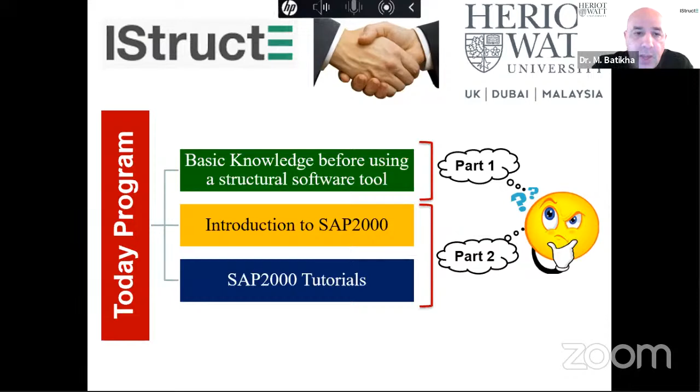And in the second part, I'm going to use SAP2000 as a common software to apply this basic knowledge I'm going to provide today. So let's start with the basic knowledge. As all of you know, the structural system means that you have a structural element and support, and this structural system has loads applied to the structural element.

When we are talking about the structural element, we are talking about two things here, material and dimension. So you need these three parts to be ready for your software. You need the structural element, which means material and dimension. You need actions, load, and you need support.

As well, the common lateral load comes from wind load, which is external pressure applied to our building, and seismic load. The seismic load is ground movement, but because of the dynamic nature of this ground movement, we transfer this ground movement to an equivalent force applied to our building. But actually the seismic load is ground movement. It's not a force applied to the building.

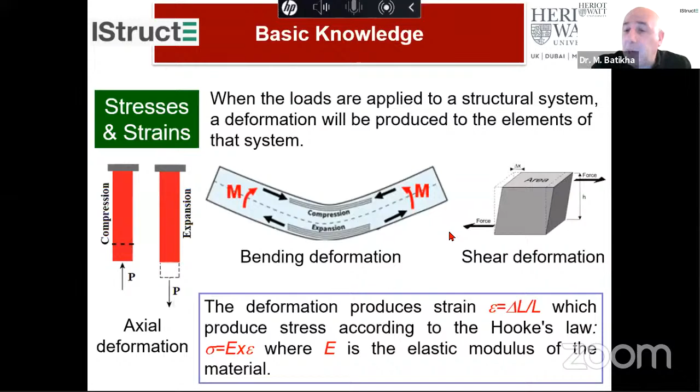When you combine these strains with the elastic modulus, and the elastic modulus here represents the material. So any material, according to its type, has an elastic modulus. So when you combine the strain with the elastic modulus, you obtain a stress. When you take this stress and combine it with the properties of the section, for example, stress times the area, you obtain a force. Because of that, we call this force the stress resultant. That's what we call internal force, but actually it comes from the stress.

We have another type of stress, which is shear stress. The shear stress comes from two types of forces: shear force or torsion. The torsion as well causes a shear stress. But actually, these stresses do not cause the failure of the structural element. The combination of these stresses provides us something we call principal stress.

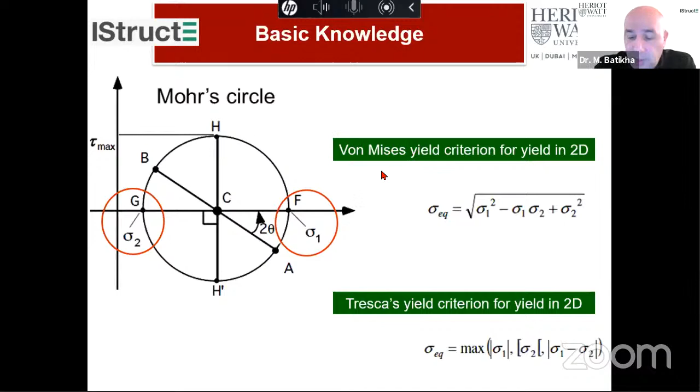Now, what is the aim of the structural design? We always in structural design look at two criteria. First of all, the strength. So we need to make sure that the material doesn't fail under a certain stress, or under principal stress, because principal stress is a combination between axial stress and shear stress, and it's bigger than any isolated stress. And the stiffness: we always need to make sure there is not much deformation.

You may have deformation but not failure, but this deformation will not allow you to do other things. If you have much deformation, you cannot install finishing, for example, or people don't feel comfortable. For example, if the slab is too thin and it deforms, it shakes under movement. So this will cause an uncomfortable life for the residents. So you need to check as well that the deformation is within a limit.

Now, after this introduction, before you start using any software, you need to collect the structural analysis data. You need to make sure that all these data are available before you start modeling or using any software. First of all, what is the type of element? Second, what is the dimension? When I'm talking about dimension, I'm talking about 3D dimension, section and length. So 3D, because the section has two dimensions.

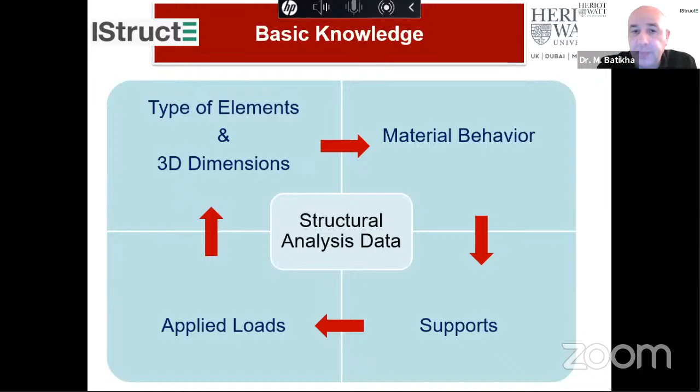For example, some elements like a slab. The thickness of the slab is too small in comparison with the other dimensions, the length of the slab in two directions. So why deal with the thickness? We can transfer this 3D slab element to a 2D element, and we just model the face of the slab. So there's no need to model the thickness.

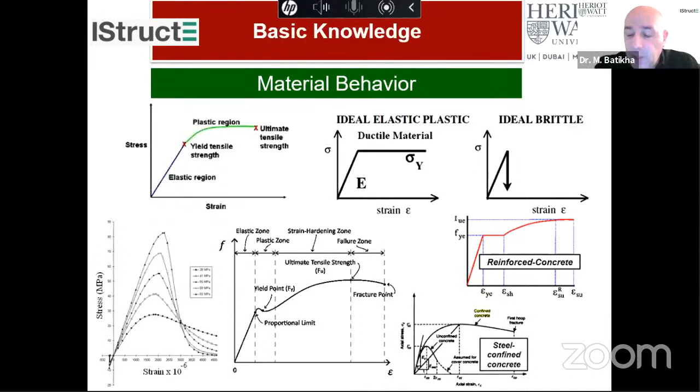You see that before you add steel, the failure of a cylinder of concrete is very brittle. But after you add steel, here you confine the concrete by steel. So you see how you have long deformation before the failure, and the steel provides more strength and more ductility. So you need to know what is the material you are dealing with and what is the curve of this material.

Why? Because in reality, you have a little displacement, but this spring has a stiffness, which is the force applied to this support over the deformation. So for example, in reality, the column itself is not a fixed support because you have deformation in the column, but this deformation is too small compared to the force, so the stiffness is considered infinity, and because of that, we say that we don't have movement below that beam if it's supported on a column, so we add a support. But actually, the real behavior is a spring.

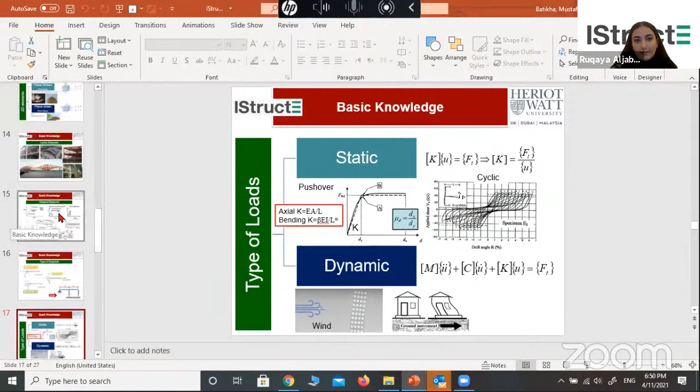Hello. Yeah, we can hear you. Yes, ma'am. I'm talking about the axial loading. Yes, axial load, okay. So you apply axial load to an element, like to a column or something? Axial load to beam, sir. Axial load to beam. Yeah, so have a look here.

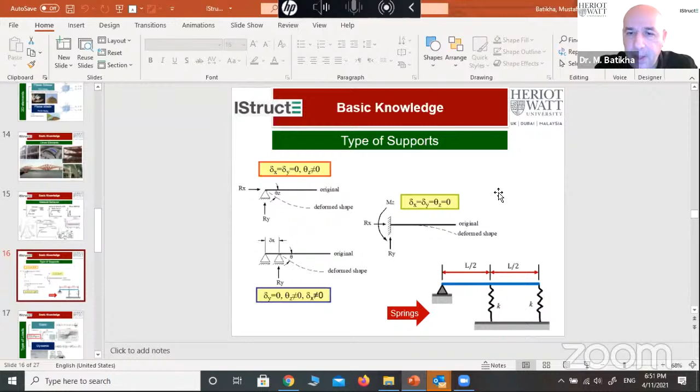When you apply axial load to a beam, you will not have shear force unless you have buckling. Why? Because the buckling will cause a bending moment. As I explain here, I'm not sure if I'm still sharing my screen. Yes, sir, you are. Okay, so here,

this is the axial force. This is an example of the axial force here. And this is a beam actually. Don't consider this as a column. Consider it as a beam and you apply axial force. So you see that without buckling, the shear force and bending moment in this element is zero.

But if you have buckling at this element, you will have extra bending moment. And because you have bending moment, you will have a shear force. You will have a lateral reaction here because of this extra bending moment. So at that time, yes, you will have shear force, if you have buckling.

Thank you, sir. Yeah.

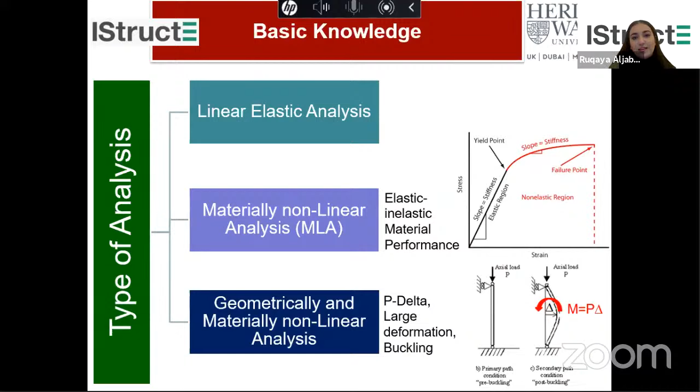Last question is from Mohammed Faisal. He's saying, my question is regarding what was mentioned earlier about dams. It is a massive structure which has measurable dimensions in 3D. So if we modeled it as a plane element, can we neglect the third dimension stresses and deformations? And by third dimension, he means the width of the dam.

Yes, sure. There is a special element in software. The software uses a different name for that element. It's a plane strain element. So if you model this face here, and you give order to the software that this face is plane strain, the software itself will understand that this is a plane strain because of this thickness

here, okay? And we do that with soil modeling, and as you see here in earth fill dams, yes, we do that. But you need to give order to the software that this element is a plane strain element.

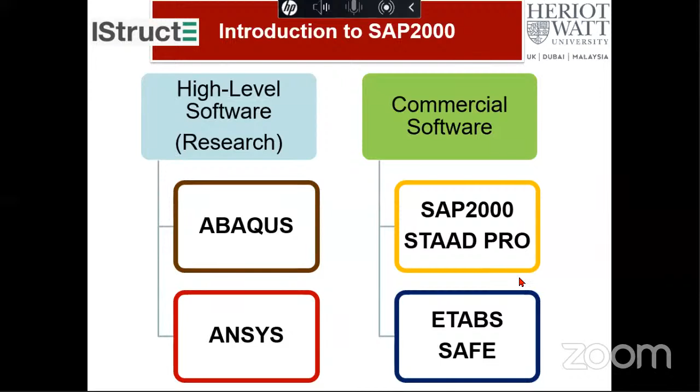So after this basic knowledge, we selected SAP2000 to introduce it to you. And I believe that most of you are working on SAP2000 or have an idea about SAP2000. But before we start with SAP2000, let's give an idea about the software available in the market. First of all, we have two types of software. The first type is high-level software, and it's for doing research. For example, Abaqus is research software. So it's not easy to be used.

And if you are using this software for a simple problem, it's not economic. So actually, we use Abaqus when you want to introduce the nonlinearity of the material, to do buckling, something like that. And ANSYS as well is research software. And we have many specific software. Abaqus is general research software you may find in most research institutes. We have commercial software like SAP2000, which is general software.

But again, SAP2000 or STAAD.Pro, for example, these two programs deal with a limited type of elements. For example, I talked about many types of elements: line element, 3D element, plane strain element, plane stress element. And I talked about the nonlinearity of the material. So SAP2000 or STAAD.Pro is sometimes limited. It doesn't take

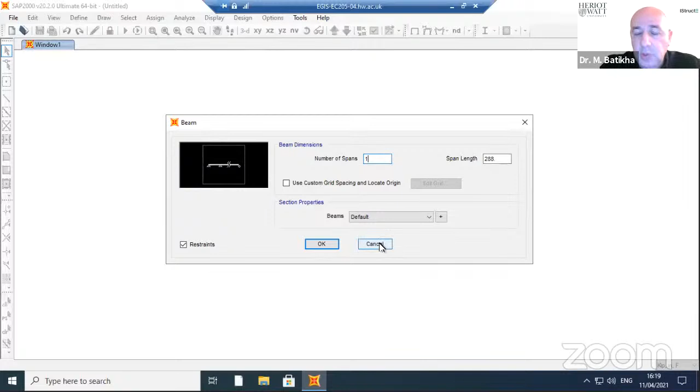You see here on the right bottom, there is a box for the unit you are going to use. Now the units we are using are kip, pound, and feet. Okay, so we are going to change this to the unit we know. So we open this box and we select kilonewton meter.

Okay, now I'm going to repeat what I have done. So file, new model, I'm going to select beam. Now, the number of spans, we have one span for this beam, and the span length, as seen here in my model, is 6 meters. So it's 6, it's ready here. So I'm going to say okay.

So you see here that our beam is ready. And this beam is a one span beam. We can divide this span into many parts, by the way, by going to edit. If you go to edit, you will see a lot of commands here. Like, for example, edit line, divide frame. So you can divide this frame into many frames.

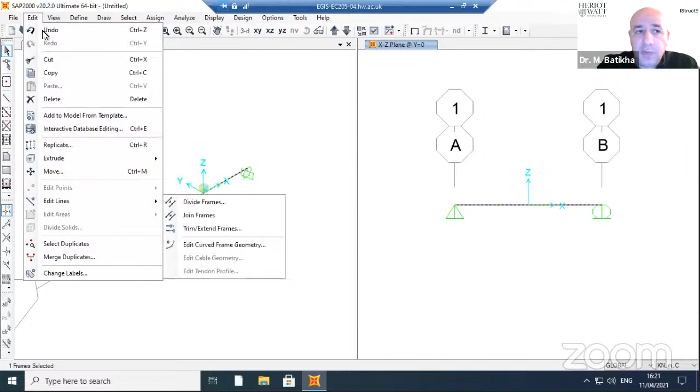So you can add joints, you can add extra parts. So you see that edit offers you a lot to do as well. You can copy, for example, replicate here. You can move. There's a lot; we don't have that much time to go through each command, but if you are working alone, you can try these commands, and it's very easy to use. SAP actually is easy to use.

Now, here I have length, but I don't have a section yet. Before I have a section, I need to have material. So to define a material, you go to define here. In define, you can find material. So we select material. You have two ready materials here, one for concrete and one for steel, but you can add your own material, for example, if I say add new material.

Okay, I want to start with steel, and I want to add user. Have a look. Standard, what's the standard? You can keep the standard ASTM, or you can use your own material, user material, as seen here. And I say okay, I'm going to call it steel. You can change the name if you want.

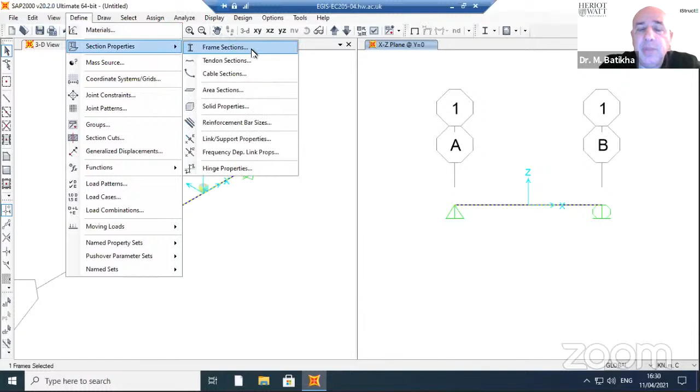Now here there is an assumed section by SAP, but if I want to include a new section for steel, I can import this section. So I'm going to say import new property. Have a look. It's steel, I section. I'm going to select I section because in my example here, we have a steel section, UK beam, 356, 171, and 51. So I'm going to select I section.

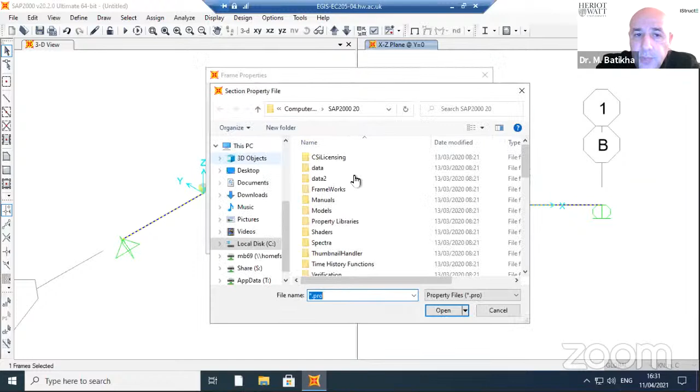You see that there is data open to me. So if I go down, you can use a section from AISC. Here, for example, BS shape. So I'm going to open BS shape here, and I'm going to say open. You see a lot of ready sections open to me, hot rolled sections. So I'm going to select the section I'm looking for. It's this section, you see. And I'm going to say okay.

In this section, have a look, immediately it drops the size of the section, okay? You can do your own section, by the way, and add your own size. It's not necessary that you take the same section. You can do modifications to these numbers as well.

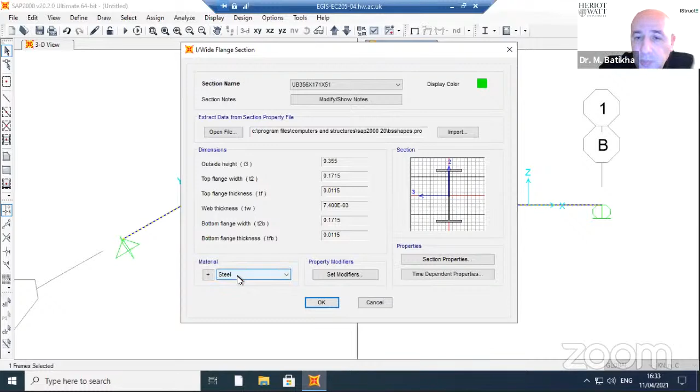Here, when you go to the material, you need to select your material. So have a look. If I open this arrow here, I'm going to select the steel I set for this example. So here the material is steel. So be careful not to forget to change the material for this section. I'm going to say okay now.

You see that I have this type of section. So I have this type of section, and for this section, we have the material we select. I'm going to say okay. Now, have a look. If you go to this mark here at the top, you see here at the top, and you open it, you will obtain here display options.

In that display option, if you go to the frames and you ask for sections, to see what section applies to your element, and say okay, you will see that you don't have the section you created. You still have on your element the old section, FSEC1. This means that you need to assign the new section to your element.

How do we do that? We go to assign here. You see this tool at the top, assign. So we open it. This tool can assign to the element, to the joint. For example, you can change for a joint the type of boundary condition of support. You can release or you can do a constraint for a certain joint. You can as well add a section for a frame.

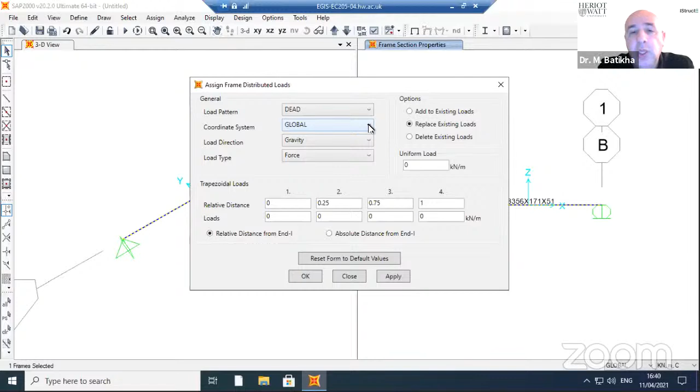And this dead load, I want it to be in the coordinate system. We have two types of coordinates in any software, not just SAP2000. We have global coordinates, which is XYZ, and we have local coordinates. So the local coordinate belongs to each element, but the global coordinate belongs to joints and all elements. So it's the XYZ.

Okay, what is the load direction? Have a look at the coordinate here on the screen. You see that the X axis is along my element, and the Z axis is perpendicular to the element. I want to apply a dead load parallel to the Z axis. So I go to load direction and I select Z. Here there is already a box for uniform load. So for example, I want 20 kilonewton, but the direction of that 20 kilonewton is opposite to Z. So I add minus 20.

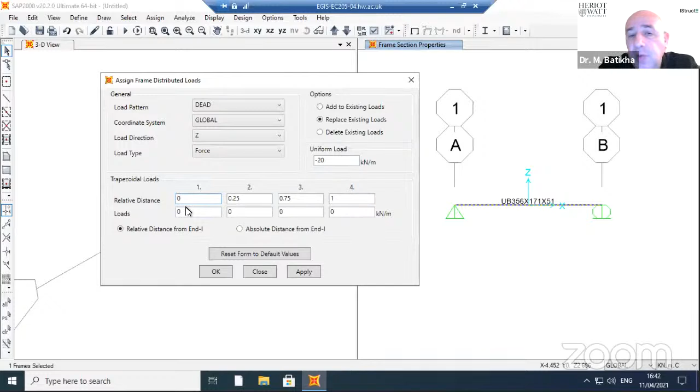By the way, these boxes here are for doing loads different from uniform load. So you can do rectangular, non-rectangular, trapezoidal load. You can use this box to do triangle load, trapezoidal load, so different shapes from the rectangular uniform load. But if you have a uniform load, you can use this one. So this box here is to introduce non-uniform load to your element. I'm going to say apply and have a look now. I have 20 kilonewton per meter as a dead load.

I need as well to apply a live load of 75 kilonewton, 2 meters away from support A. So again, I'm going to select the element. As you see, I select the element, and that dashed line is a note that you selected this element. And I'm going to assign again and select frame load again. But now my load is a point load, so I'm going to select point load. Now, the load pattern is live load, so I open and say live load. Again, for this live load, I'm going to select the global coordinate system, and again the direction of the load is parallel to Z.

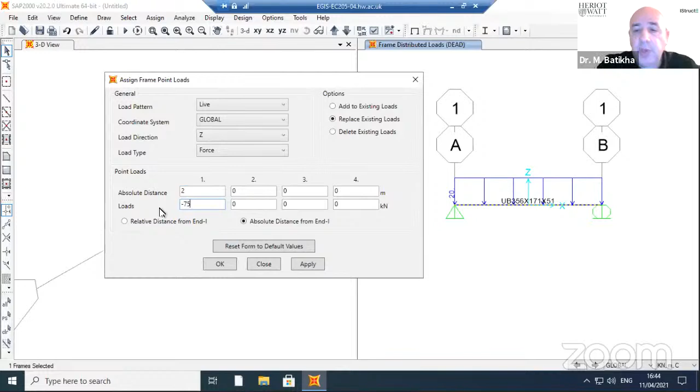Now, I need to apply this load 2 meters away from the left support. So what do I do? Have a look. You have two ways to apply that: you use the relative distance or you use the absolute distance. I'm going to use absolute distance. What is the distance? I'm going to say 2, and 2 is 2 meters. What is the value of the load? In my example, the value of the load is 75 kilonewton, so I'm going to say minus 75 because it's opposite to Z. I'm going to say okay, and have a look here at the screen. I have live load equal to 75 kilonewton.

To solve this example I need to do a combination here. So I'm going to use the Eurocode 1.35 dead load plus 1.5 live load. So I open define again, have a look. There is a command in define called load combination. I'm going to open it and add a new combination. I'm going to title this combination by the combination I know. It's better that you title the combination with something you know. So 1.35 dead load plus 1.5 live load.

Have a look here. The first case is the dead load. The factor is 1.35, so I'm going to say add. The second load case name is live load. What is the factor for live load? The scale factor is 1.5. I'm going to say add as well. So you see that I have two loads in this combination: the dead load is 1.35 and the live load is 1.5. I'm going to say okay. So this is the combination I have, and I'm going to say okay.

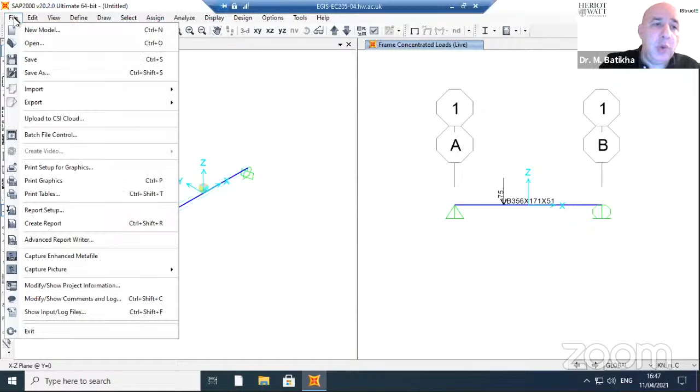So I'm going to save it. Save as, and please don't save directly, save it within a folder, because many files will be opened after running. So I'm going to create a folder. I'm going to call it SAP2000 IStructE. I'm going to name this example 1. Save. So here is example 1. I'm going to run this example.

Have a look, this is the button to run the example, or you can go to Analyze and say Run Analysis, or you go directly to this arrow here, sorry, this one. So if I open it to run this example, you see that I have dead load, live load. The modal case here, you don't need to run it, because usually this is run for dynamic.

So you don't have dynamic here, so you don't run it. So I press here, don't run this case. And I'm saying here, run now. So now you see on this screen that we have a deformation. Now let's explore our result.

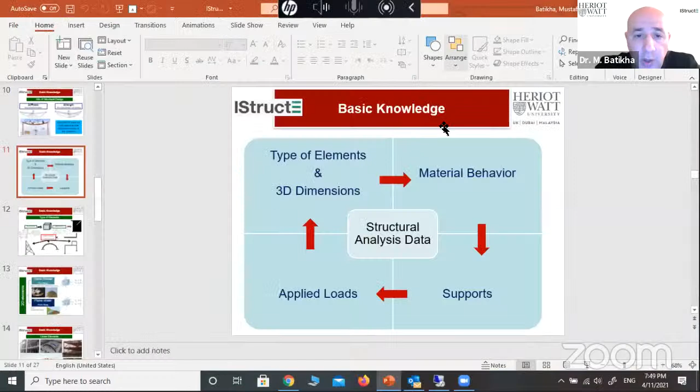The first button is to get your model back to its origin. So, for example, if I'm standing on the window on the left and I press this button, you see that the model gets back without the deformed shape and it's back to its origin. The second button here is to show the deformed shape. So if you press here, this button,

you will be asked under which deformation you want to see. Usually for steel, we check the deformation under live load. So I'm going to say under live load, and show me here the original wire shadow, which is the original shape. So show me the original shape. So if I say okay, have a look, this is the deformation of this

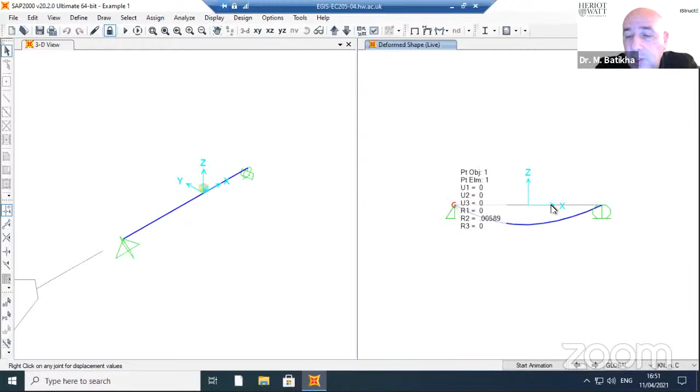beam. You don't have a value here. This doesn't show the value. It's because the deformation will be shown if you have a joint. Here you have only 2 joints for this element, this support and this support, but we didn't create a joint at mid-span. When you create a joint at mid-span, and I'm going to show you later, you can see the deformation.

Now, the bending moment and shear force. So if you go to this button here, and you open it, you can go to joint, and at that time you obtain the reaction. So for example, if I go to joint, and I ask, give me the reaction under the combination, and I say okay, so have a look.

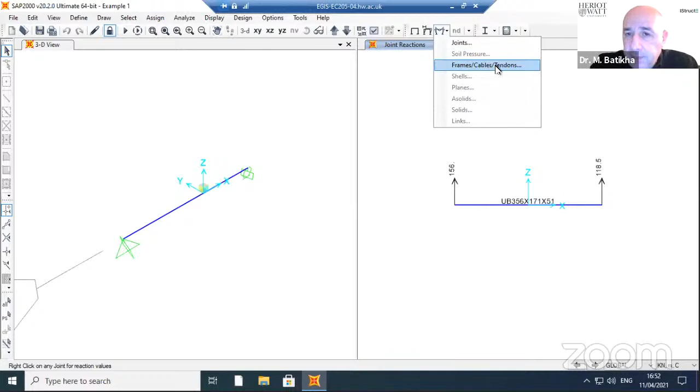We have 156, which is the same as the shear in the example. You see, manually, we obtained 156. And we can go to this command as well, frame, here, to see the internal force or the stress resultant, I call it. Again, I select the combination, and I ask, can you please show me the shear along local axis 2, okay? And here is the shear

diagram. You can show this diagram, you can show the values on this diagram. So if I repeat this command, if I go to this button again and select frame, have a look. There are 2 options for the diagram, fill diagram or show values. Show values. So say okay, and you will see that this is the shear diagram as expected

manually. And here you see that there is a cut because you have a concentrated load here, 75 kilonewton live load. Because of that, you have a change in the diagram. And as well, if you want to see the bending moment, we go again to this button. We select frame and moment about 3-3. These 3-3, 1-1, 2-2 are local axes. So about 3-3, okay, and here is the bending diagram.

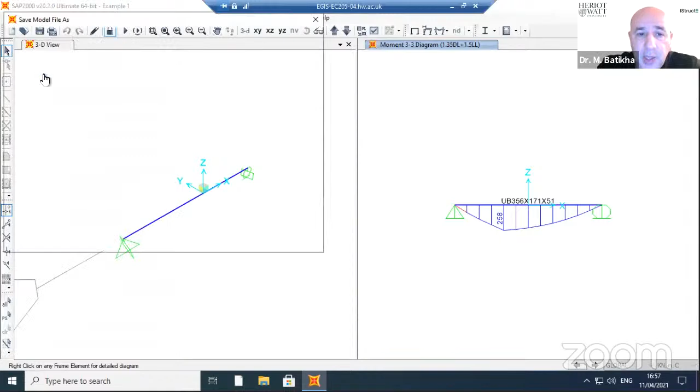Okay, so this is the first example. The second example is the same loading, but I'm going to use a concrete section. So I'm going to save this example as example 2. Please save the same example under a different name, example 2, to make some changes. So I'm going to say save.

I'm going to define again. I'm going to create concrete material. So add a new material, concrete, and user defined. Again, I'm going to make the density 0 to avoid it being included twice in my calculation. The unit, I'm going to change it to Newton millimeter here.

In my example, the elastic modulus for concrete is 34, and the Poisson ratio is 0.2, and FCK, the characteristic compressive strength, is 35. So here is 34,000. The Poisson ratio is 0.2. And this one, FC is 35. And you can keep the rest the same.

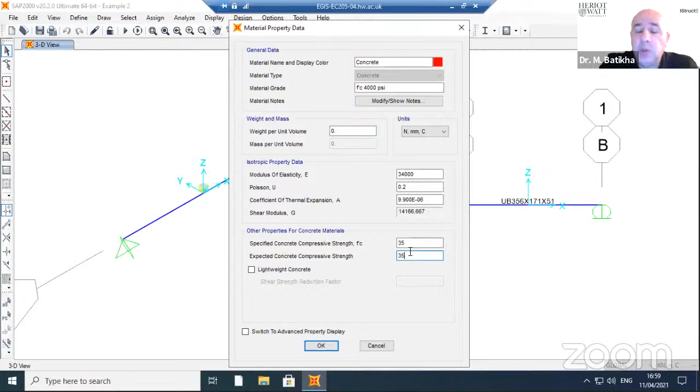Again, these two values are not needed if you want to do structural analysis only. But if you want to do design or plastic analysis, at that time you need these two values. So now I have concrete material as seen here, and I'm going to define a concrete section.

So I go to define again, section property, frame section, I open it, and I'm going to add a new property. The material is concrete. When I say concrete, have a look, there are ready sections here. I'm going to open rectangular. The depth for this section in my example is 600 and the width is 250. So here is 0.6 meter because my unit is in meter, and here is 0.25.

Yes, meter again. And by the way, you can add reinforcement for this section if you want to do plastic analysis or check the capacity of the section. So here there is concrete reinforcement. But again and again, please don't use this unless you do manual validation. So do an easy example, just to be confident of what you are doing.

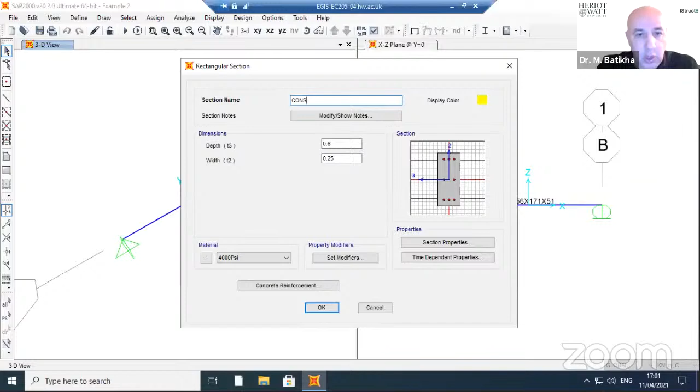So I'm going to say okay, and sorry, I didn't change the name of the property here. I'm going to call it con section. So have a look, I have con section here. I'm going to select my element and assign this section to my element. So I go to assign, frame section, con section, and say okay, and have a look, the section here is concrete section. It's not steel anymore.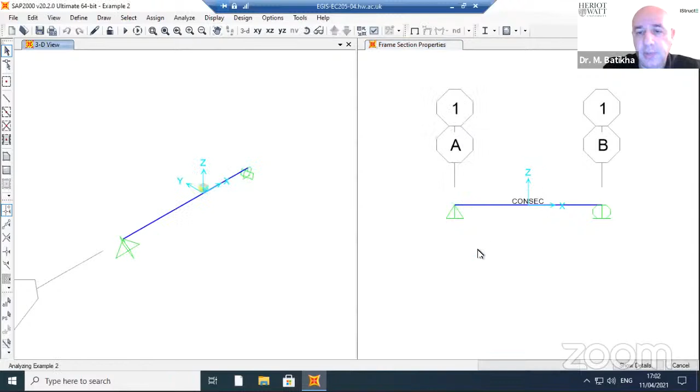Everything is ready. I have support, I have dimension, I have material. So I run again. For sure, in this section you will have the same bending moment and the same shear force. Why? Because it's a determinate structure. But if you have an indeterminate structure, for sure you will have different values.

But you will have for sure different deformation. The deformation is very different here. Why? Because the moment of inertia and the material are different in both examples. So the deformation will be different. Okay, I believe we may need a break here. So we finished example 1 and example 2, and the other examples will be fast.

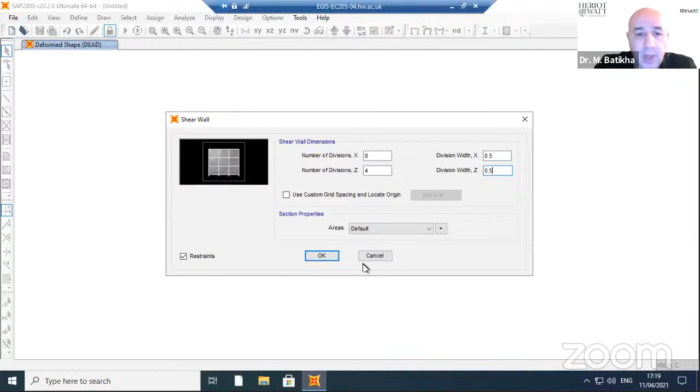So we have 4 meters length in X direction. I'm going to divide this into 8 divisions, which means 50 centimeters or 0.5 meter for each division. In the Z direction, I have a 2 meter dimension. I'm going to keep the division of half a meter in Z direction as well, which means I'm going to divide this slab into 4 divisions. So I'm going to say 4, and the division width is half a meter again. So I'm going to say okay. So have a look.

Here we have a slab. But have a look at this slab. Because I selected a wall, the support is only at the bottom. Have a look, at the bottom we have support. So we need to change this support.

So I'm going to select this support, this edge. Have a look, the nodes are selected. I'm going to select the top edge as well, because I have support at top and bottom. And I'm going to change this support. How do I do that? I go to Assign,

then Joint, Restraints. In these restraints, you can select the support you want, or you can add the support manually. For example, if you select pin support here, have a look. This means that you prevent the deformation in 3 directions. But actually, if you apply this pin support, you may have axial force when this slab deforms.

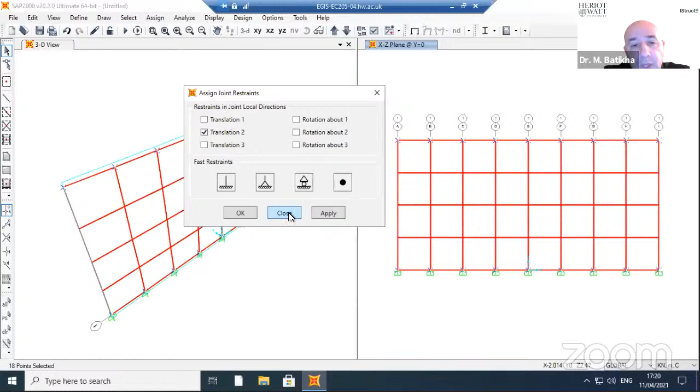Because of that, I'm going to tell the program to only restrain this slab against the Y direction, the out-of-plane direction. Have a look at the coordinates here first. You see that I have coordinates X and Z in plane, but out of plane here is the Y axis. So I'm going to say, please restrain the deformation in the Y direction, the out-of-plane direction.

So I'm going to say okay. So now have a look, the support changed. It's not a fixed support anymore at the bottom. It's in the Y direction. Again, I'm going to define material and section. So Define, I'm going to do this step fast. So Define Material.

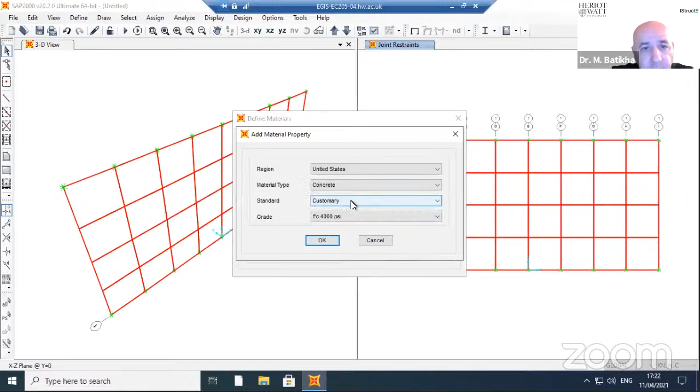I'm going to say Add New Material, and I'm going to select concrete. And I'm going to add user material. I'm going to say okay. So this is concrete material. For the density I'm going to say 0, because I already included the self-weight in the load. And I'm going to add the properties of the material. So here, Newton millimeter.

So here, have a look. This is the property of the material. E is 34, FCK is 35, and Poisson ratio is 0.2. So here is 34,000, 0.2, and here is 35 megapascal for FCK. I'm going to say okay, so I have concrete material now.

Okay. Now I'm going to define a section for this area. So I'm going to Define Section Properties, Area Sections. Have a look, area section. Open. It's a shell section. I'm going to add a new section. I'm going to give it a name. I'm going to say that this is a slab. Have a look at how many types you have.

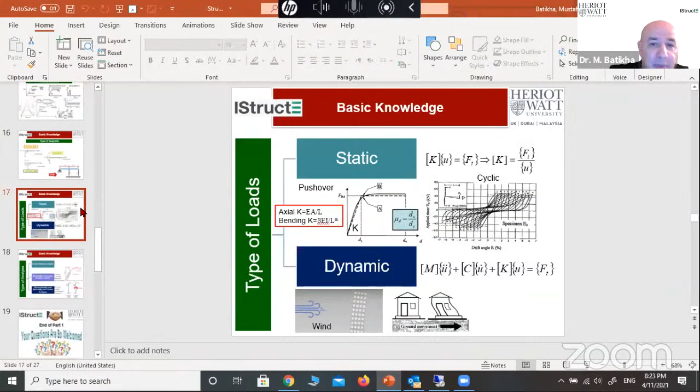So for example, in our example, the minimum dimension or the short direction of this slab is 2 meters. If we take 1/10 or 1/20, for example, this means that this slab is 100 millimeter.

So this slab is for sure a thin slab, but the thick slab is what I talked about, plane strain, where you consider the shear deformation. So plane strain is the thick slab. So here you select shell thin or shell thick. When you select plate, this is usually for steel, and as the name says, it's a plate, so the stress doesn't act in the Z direction.

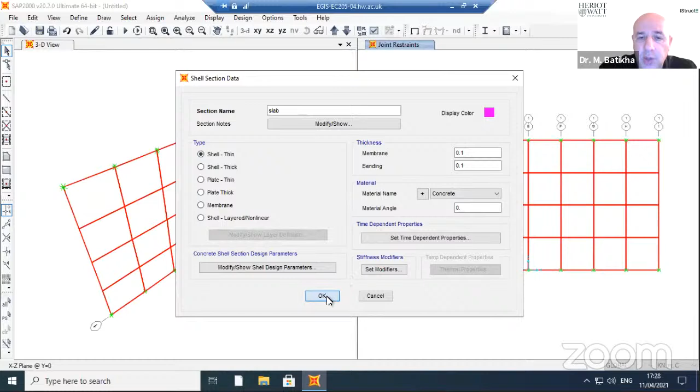So I have now this element. I'm going to select the element here in my screen and assign this section to this element. So have a look: assign, area, because I'm dealing with area, sections, slab. I say okay and have a look. All the elements here have slab section with concrete material.

Now I'm going to apply load. Again, I'm going to define and open load pattern. Dead load, I'm going to make the self weight 0 here. And I'm going to do live load. We did that before. So live, and I'm going to add new load pattern, and I'm going to say okay.

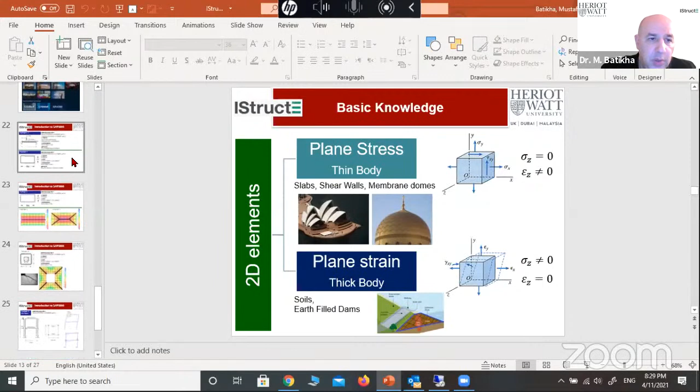Now, what do I have in this example? We have dead load 3 and live load 2. But actually, we need to add here the self weight itself. We have 0.1 thickness, and we know that the density of the concrete is 25 kilonewton per meter cube. So 0.1 times 25 gives a self weight of 2.5, plus 3. So we have a total dead load of 5.5 kilonewton per meter square.

So I'm going to select this element and say assign, area load. What do I need to add? I need to add uniform. So here, uniform, dead load, global. Now, this load is parallel to the y-axis, as seen from the drawing. And I'm going to put 5.5 because the self weight and the service load total 5.5 kilonewton per meter square. So I say okay. So now I have dead load 5.5.

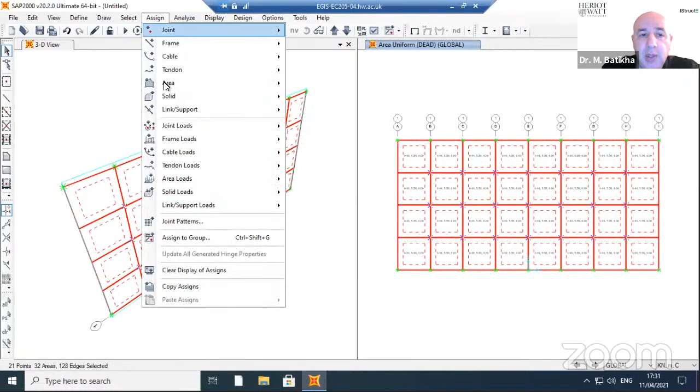I'm going to select it again to add the live load. So here, select this, assign area load, uniform again. Now I select live, and the live load is parallel to the y-axis as well. But the live load this time is 2 kilonewton per meter square. So I'm going to put 2 here, and okay.

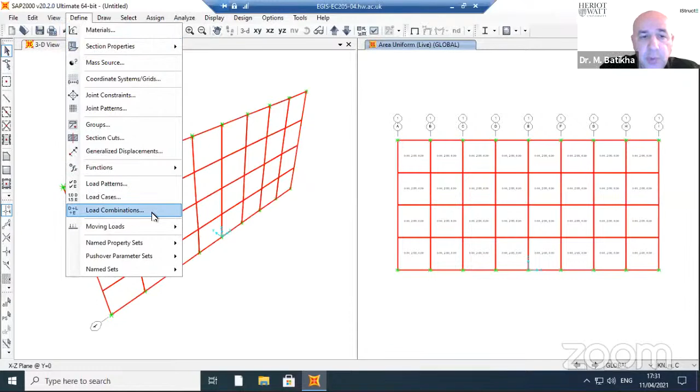So now I have dead load, live load, and I'm going to add a combination. I go to define, load combination. We did it in example 1. Add a new combination: 1.35 dead load plus 1.5 live load. For dead load, the scale factor is 1.35, and I say add. For the live load, the scale factor is 1.5, and I say add as well. So my combination is ready. Okay, okay.

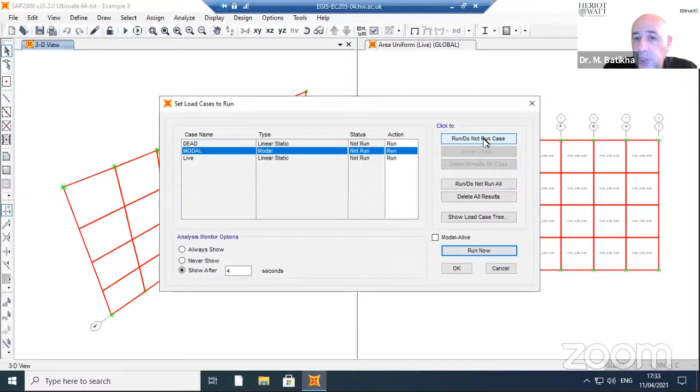Now everything is ready. I'm going to save this file, save as example 3. And it's ready to be run. Support, dimension, element type, material, everything is ready. So I'm going to run it. For the modal case, I'm not going to run it, because we run it if we need mode shapes. We don't need it here. So run.

You see, that's how we have deformation in this slab. Now I'm going to explore the bending moment. Here, it's assumed that the bending moment equals 5.2 and the stress 3.12. So I go to this button, I open it, shell, have a look, and here, resultant force.

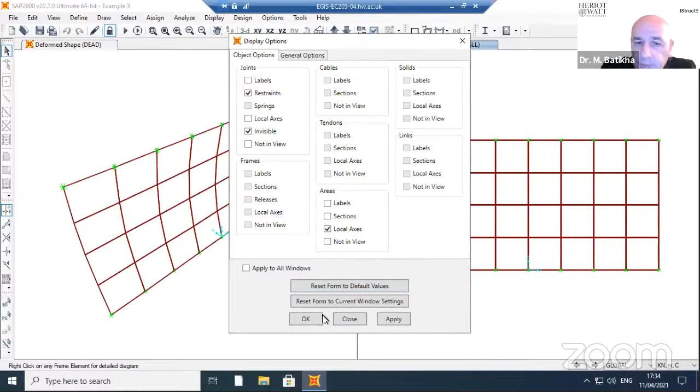I'm going to explore the local axis for this element. If I open here, at the top, this mark, I go to area, ask for local axis, and say okay. So you will see that you have this local axis for each element. The red one is axis 1-1, the green one is axis 2-2, and the blue one is axis 3. So I need the bending moment about axis 2-2.

So I'm going to open shell section, and I need bending moment M22. I say okay, and the maximum value here is 2.86. Sorry, here you see that this value is for dead load, so I need to change the combination. I select the combination 1.35 dead load plus 1.5 live load, and M22. And now I have the same answer as manually obtained. Have a look.

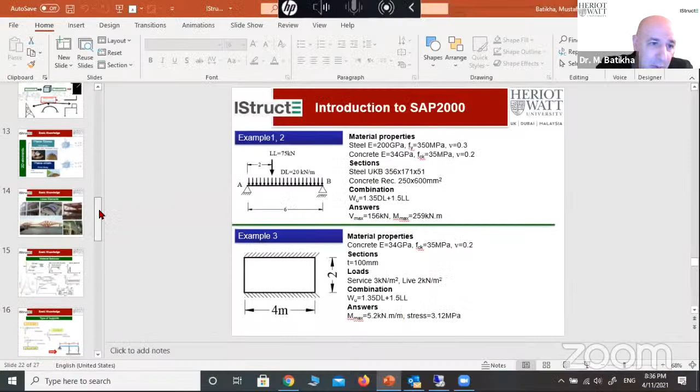If you remember, when I showed you the Mohr circle here, I said that there is sigma 1, there is sigma 2. This is the principal stress corresponding to tau equal to 0. And this gives you in concrete the failure shape. So if we go here and we ask for S max, S minimum, SVM, this SVM is von Mises. You don't use it unless you have a steel member to check if that steel material yields.

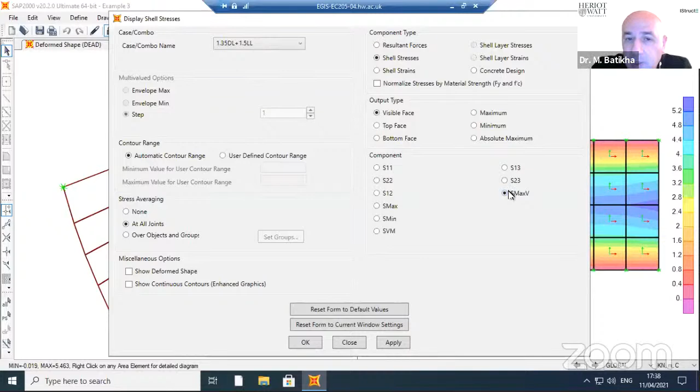Here, S11 is the stress in direction 1. S22 is the stress in direction 2, axial stress. S12 is the shear stress. S max, the maximum principal stress. S minimum, the minimum principal stress. SVM, the von Mises. S13, S23 are the shear stress, but here it's a thin plate, so you will not obtain shear stress. SMaxV is the principal shear stress. But actually to find the crack, you need S max or S minimum. So let's go with S max, apply.

And this is how this is visible. Okay, so here I'm going just to change the unit. So here is the stress, and you see the concentration; actually this is not shown because I need to show the bottom face. Here is minimum. Okay, have a look at this shape. You see here that at the center of this slab, you have like a line. Because of that, the one-way slab cuts into two at that line. And this is, by the way, the direction of the crack in this one-way slab.

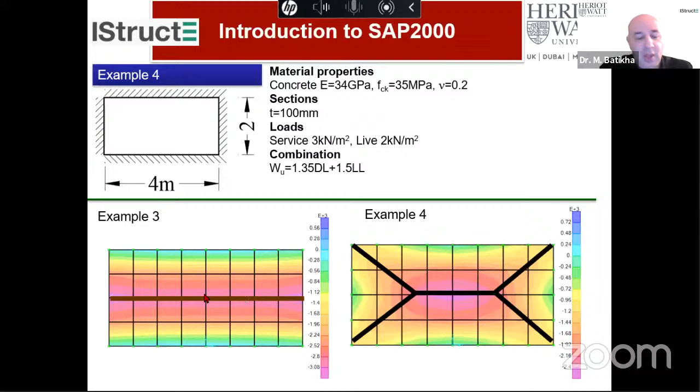Have a look at the variation of this contour. The maximum will be at the center, then it reduces slowly until you reach the support. But the concentration of this contour is at the center, and it's drawn at the line, and I'm going to show you now this line. So please have a look here. This line, you see this line? This is the crack line, how the slab cracks. So this is the example 3.

I'm going to deal with the same plate, with the same slab, but I'm going just to change the boundary condition. So I'm going to make it a two-way slab, exactly as example 4. So now this slab is supported from 4 edges, just to see what's the change. It has the same material, the same force applied, the same combination. So I'm going to save this example under example 4.

And I'm going just to add here, you see these nodes at these two edges. Previously they weren't supported; I'm going to support them. So I go to assign, joint, restraint. Again, I'm going to say, please restrain this joint against the Y movement. Okay, and you see that now all 4 edges are restrained. I'm going to run this example. It's very good to see what the difference is now.

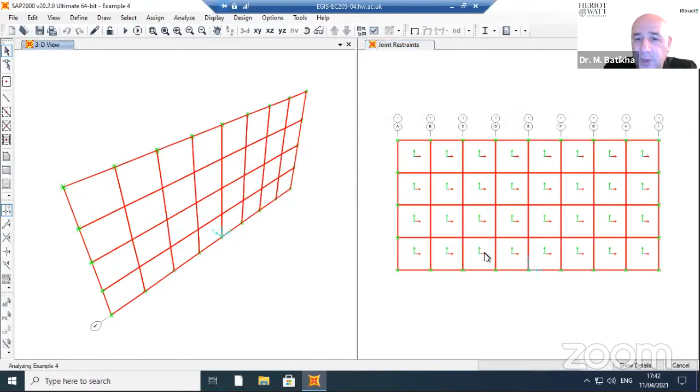So this slab, when you support it from 4 edges, acts now as a two-way slab. And the transfer of the loading to the edges comes through 4 regions, trapezoidal and triangular. At Heriot, I deliver a course about plastic analysis, and we deliver a topic called Yield Line Design. And to obtain the yield line design, you need to order SAP2000 like here: please provide me the principal stress.

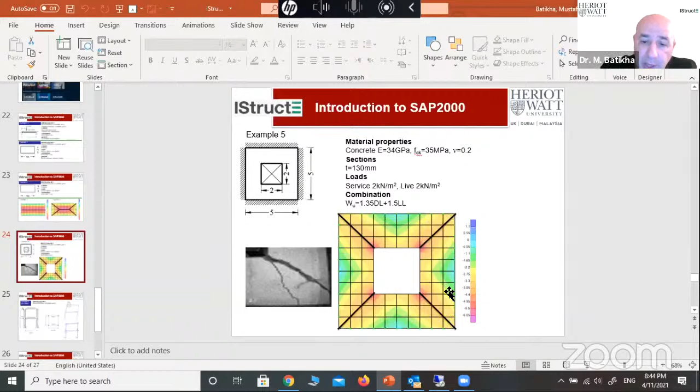Here, another example about an opening. You can do the same example. I'm not going through this example because it takes time. So you can model, and after that you can remove this opening. But what I want to say is to look at the principal stress again here, the principal stress.

You will find that there is concentration at the corner of the opening. After that, have a look how there is a line here between this corner and this corner. Have a look at the contour as you do a line. This gives you how this slab cracked. If you compare between this model and the real model here in the experiment, you will see that in the experiment you obtain the same direction of cracks as the software provides you.

So that's what I said, that if you want to know how the slab cracks, you need to ask for principal stress. This is very useful because if you want to strengthen this slab, you need to know how the crack happens in this slab to add reinforcement or to add a steel member or to add FRP, for example, fiber reinforced polymer. Because if you know this crack, you do a reinforcement perpendicular or across this crack, and at that time you strengthen this slab. So this is very important.

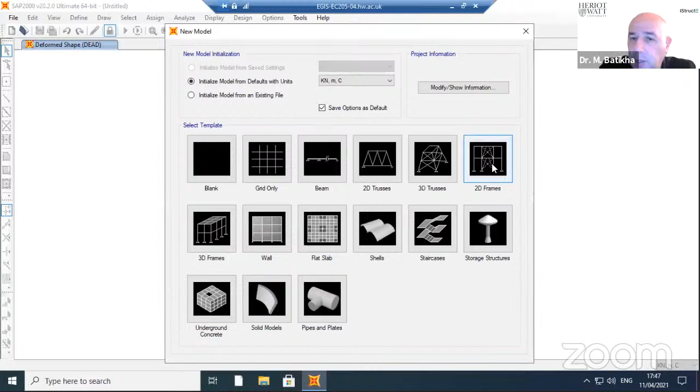First of all, I'm going to change the unit here to kilonewton meter. And I'm going to File, New Model, 2D frame. There are some questions you need to answer. What is the number of stories? You have 2. Number of bays, you have 1 bay only. What is the story height? You have 3. What is the bay width? You see in the example that the bay width is 5 meter. So it's 5, and we say okay, and here is our frame.

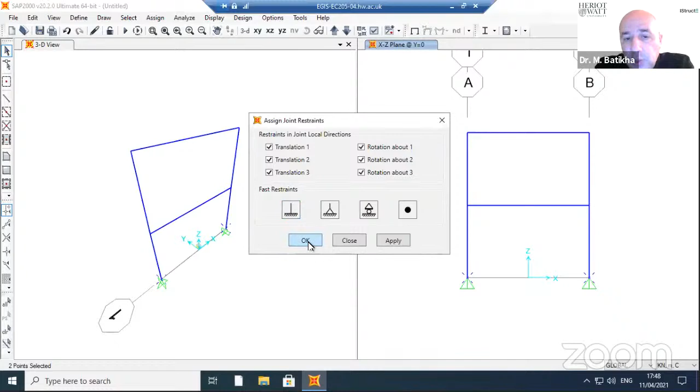I'm going to change the support. So I'm going to mark the joints; they are pin joints. I'm going to assign and change the restraint to fixed joint. You can press this button and immediately you obtain a fixed joint. So no translation, no rotation. I say okay, so now you have fixed joints. I'm going to define material and section.

Define material. We have here steel material as seen here. So add new material. I'm going to select user material, standard user, okay. For self weight, I'm going to say that it's 0. And I'm going to change the unit to add the properties of the material. The elastic modulus is 200,000 and the Poisson ratio is 0.3. I'm not going to change this because I'm not going to do design or nonlinear analysis, so it doesn't matter. So this is the steel material, okay.

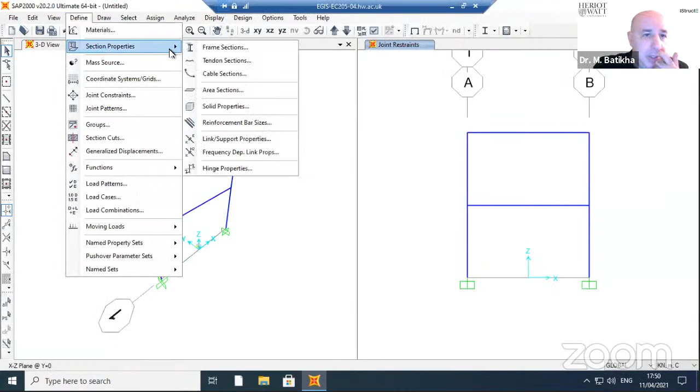I'm going to select section. For this frame, I need 2 sections, 1 for column and 1 for beam. For column, you see that the section is UK column 152, 152, 23. So I'm going to select section, frame section, import new property, I section, and as I did in example 1, I'm going to BS shape, and I'm going to select UC 152, 152, 23. So okay.

Again, don't forget to select the right material. So you open here and you say that this is steel. You say okay, and you have UK column. I'm going to select a section for beam. My beam here in the example is UK beam 178, 102, 19. So I need this section. I'm going to say okay, and don't forget that the material is steel material. Okay, so I have 2 sections. I'm going to say okay.

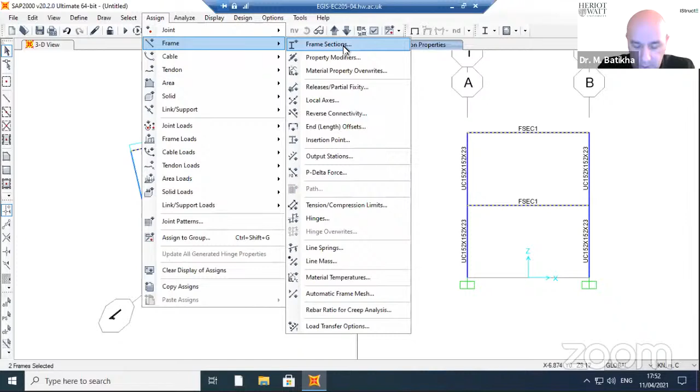For the column, I'm going to select the column as seen here. And I'm going to assign frame section for the column. I'm going to assign this section to the column. So have a look, I have the correct section. For the beam, I'm going to select the beam and I'm going to assign the section for this beam. So here is the UK beam.

So my model is ready with section, with material, with support. I need to add force. What is the force I need to add? As seen here, at first floor, I have 10 kilonewton, but this 10 kilonewton will be divided into 2 for each frame. I have 2 frames. So actually at 1 frame, we have 5 kilonewton at first floor, and we have 10 kilonewton at the top floor.

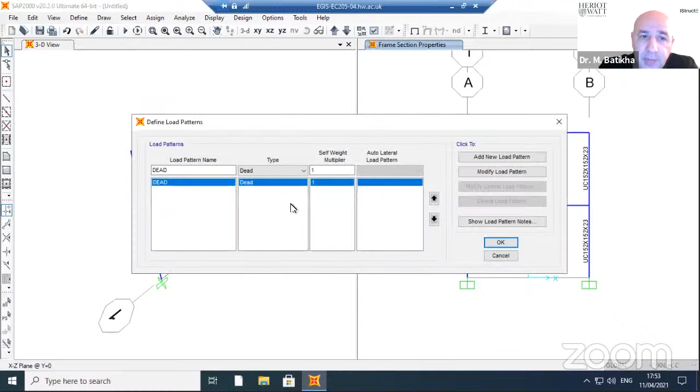So I'm going here to select this joint. Now I'm going to apply a force at a joint, not at a member. So this joint, and I go to assign joint load, but I didn't define the load yet. So I go to define here, load pattern. I say seismic. The type is earthquake and no self-weight required. So add new pattern, seismic. I say okay. Now I go to the joint here.

I select this joint. I go to assign joint load because it's joint load, force. This load will be parallel to x-axis, so it's 5 kilonewton. We agree that the 10 kilonewton we divided into 2 because we have 2 frames, so 5, and I say apply. Okay. The top will have 10 kilonewton because we have 20, but divided into 2 because we have 2 frames. So assign joint force, parallel to x-axis, and the value is 10. So here is the force applied to this frame.

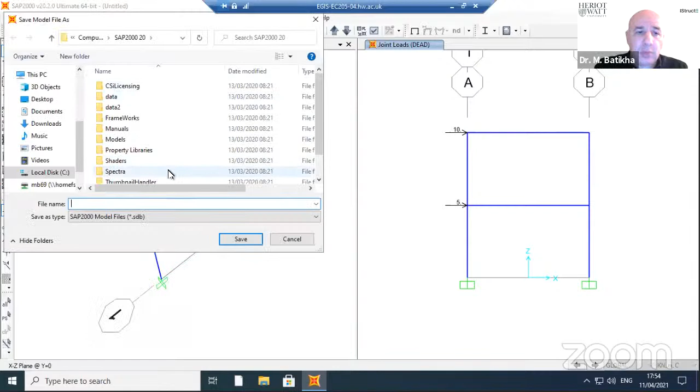I'm going to save this example under name example. I'm going to call it example 6, as in the presentation. So I'm going to say okay, and I'm going to solve it. It's ready. I don't need in this example to solve the dead load, so I'm not going to run it, and not the modal load. I need only the seismic. I need to run the seismic, and I'm not going to do any combination here. So run.

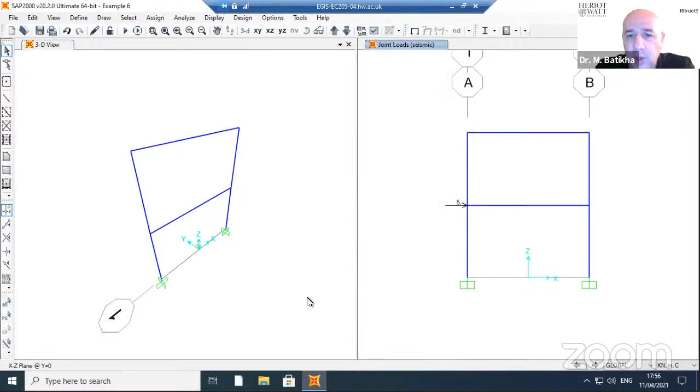So now have a look. First of all, let's do the deformed shape. So I'm going to select here deform, select seismic, and say apply. Sorry, I did a mistake, I believe, by applying loads. So this joint load force, I did a mistake that I didn't take seismic here. So I need to apply this 5 kilonewton to seismic case. I didn't change the load pattern. So I'm going to say okay. And here as well, sorry for this mistake, joint load force, and this is 10, and okay, and I'm going to run it. So you need to be careful with that.

So you see now we have a deformation. If you ask for deformation for seismic, and you stand at the joint, you will be given the deformation value. So this is telling you that the deformation value in U1, in x direction, is 0.0136 meter, because the unit is in meter, and the top story is 0.0291.

Now, if I want to explore the force, like for example, the bending moment. So here I go to this button, and I select frame. For seismic, I select moment 3-3, okay, and have a look. This is the shape of the bending diagram for a frame under seismic action. Okay, so this is how we model 2D frame.

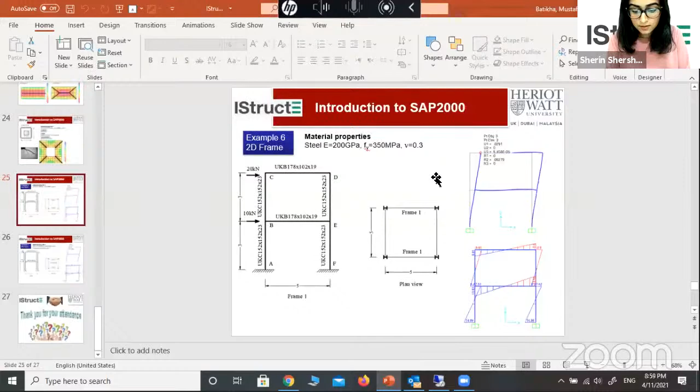I'm not sure if we have time to take the third. It's a 3D frame. I'm not sure because we are almost at the time of this workshop. So Sherin, what do you think? I believe we can go through it really quickly. I can stay, by the way, I'm ready. If everybody is happy, I don't mind. So do I go? Yeah, sure. If we can cover it really quickly, we'll have this one too. Okay, I need a further 15 minutes. It's fine? Let me just check 1 second. Yes, sir, please continue.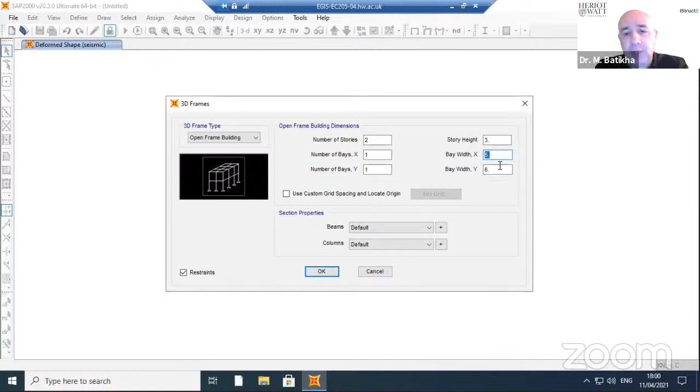Okay, so this is actually an important example here because I'm going to teach you now how you do diaphragm. And I'm going to solve this example as a 3-dimensional example. So here, I'm going to open a new model. We are going to select now 3D frame. Okay, so let's open it. How many stories do we have? We have 2 stories. How many bays in X direction? We have 1 bay. And in Y direction, we have 1 bay as well. The story height is 3, but the bay is 5 in each direction. So I'm going to say okay.

So now as seen here, we have this 3D frame, and I'm going as well to change the boundary conditions. So they are simple supports. So I'm going to mark 3 of them.

By the way, if you see these 2 arrows here at the top, have a look at the top. You can go now level by level. So you see this is level 1. Have a look at the left window and the right window. And this is the upper level. If I want to go down again, I go to this arrow to move down. So I go to the lower level and now to the foundation. So this way, you can go level by level and select the change you would like to make.

So I'm going to select the boundary condition. Then I do assign, joint, restraint, and I'm going to say fixed support. So this is okay. Now I'm not going to select for you material or frame... or let's do it fast. Okay, for the material, add new material, steel, user, okay. And here the density is 0, and I'm going to set this as 200,000, and this is 0.3, and I say okay, so I have steel material.

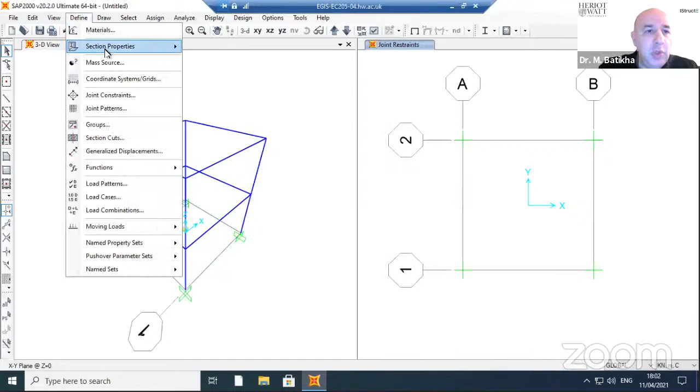And I'm going to define section property. Again, for the column, we have here BS shape, hot rolled section, so open. And I'm going to select UC 152x152x23. So here it is. And the material, don't forget to select steel and say OK. And I'm going to select my beam. So again, here is a beam, and this is the section for my beam, and I'm going to say OK. Don't forget to select the correct material, steel, OK, and here is OK.

I'm going to assign the section to my model. So I'm going up to the first floor, and I'm going to select my beams. And I'm going to the upper floor, and I'm going to select my beams. Have a look at the left window. That's 8 beams selected. I'm going to assign a section for these 8 beams. This is the beam, okay, and now they are assigned.

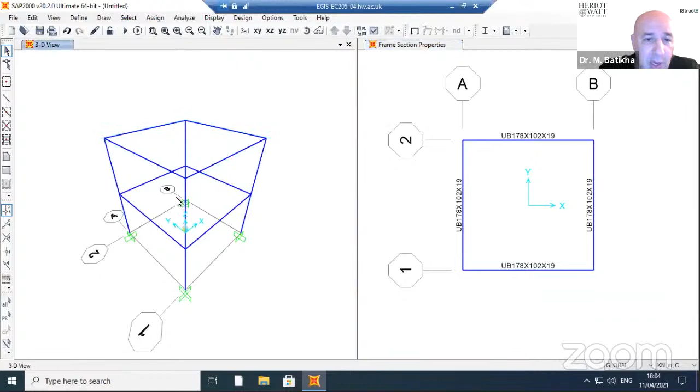I still need to select the column section. Let's have a look. What's the type of the column section here? If I go to this member again and ask SAP to give me the frame section, have a look. The frame section is FSEC1. Instead of selecting the columns one by one, I can go to the select command. Have a look at the top, select. I go to property, and I say frame section. So I'm going to ask SAP2000 to select all the sections which have FSEC1. Select, have a look. The columns are selected.

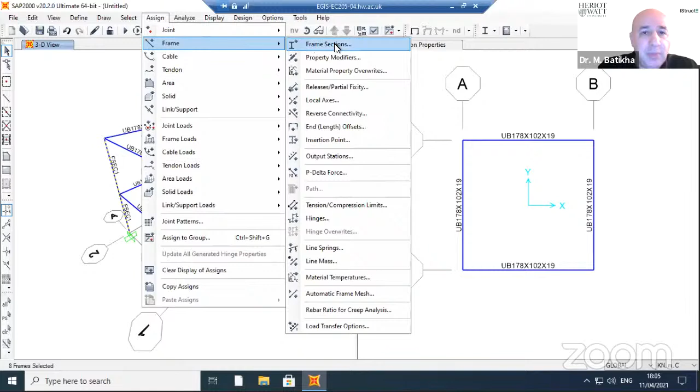I'm going to assign the section for these columns. So this is frame section. This is column. Okay, that's it. So I have now this 3D frame. I'm going to define a load pattern. Again, I don't care about the dead load. I'm going to apply seismic only. And the self weight is 0 here. So I'm going to say add new, sorry, not dead, it's quake. So I'm going to modify the load. So I have now a seismic load type. I'm going to say okay.

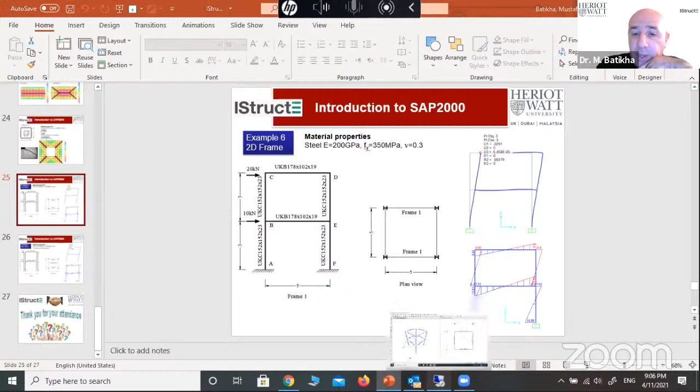Now, how do I apply seismic? And here is very important. So I have 2 forces, 10 kilonewton at the lower level and 20 kilonewton at the upper level, applied to the whole building. It's not for a certain frame. It's applied to the whole building. Where do I apply this force? Actually, I apply it to the center of the slab. So I'm going to create a slab here. Have a look what I'm going to do.

I'm going to draw. First of all, yes, I am in the top level. Have a look. I'm going to draw area. Draw rectangular area. So I go and select this point and this point. So we have here an area. You see what we have? And I'm going down as well to the lower level. And I'm going to select draw rectangular area, and I'm going to draw the area here. So have a look, I have an area at each floor.

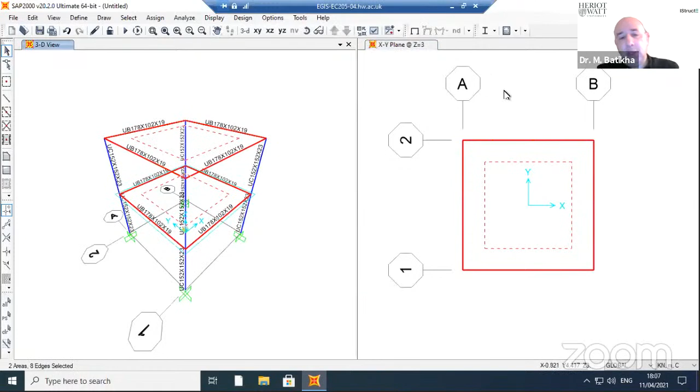I need to divide this area. Why? I'm going to tell you why. Because I need to apply the load at the center of this area. So I'm going to divide this area into 4 divisions. So I go to edit area, have a look, divide area. Here 2 by 2, it's fine for me. So I say okay and have a look. The area is divided.

I need a property for this area. I go to define material. I'm going to select concrete very fast. User, okay. This is concrete. The weight is 0. And the material, I'm going to select a material.

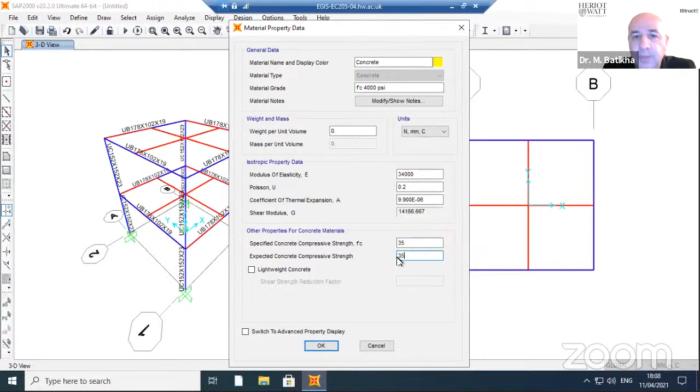So E modulus is 34,000 as I did. And I don't care about this 35 because I'm not going to design. So it's okay. So here is the material. And I'm going to define section for this area. So define section property, area section, and I'm going to add a new section.

I'm going to select shell thickness. I'm going to call it slab again. And the thickness is 0.1, 10 centimeter for this slab. And the material, again, is concrete. Don't forget to add the correct material. I'm going to say okay, okay.

I'm going to select this area and at the top as well. And I'm going to assign area section, and select slab.

Now here you have 2 options actually. You can add the seismic force directly to this point because this point is the center of the area. Always when we apply the lateral load, we apply it to the center of the area. And SAP2000 or any other software will distribute this to the lateral resisting system. But I'm going to teach you a new command, which is the diaphragm command, which is a very important command.

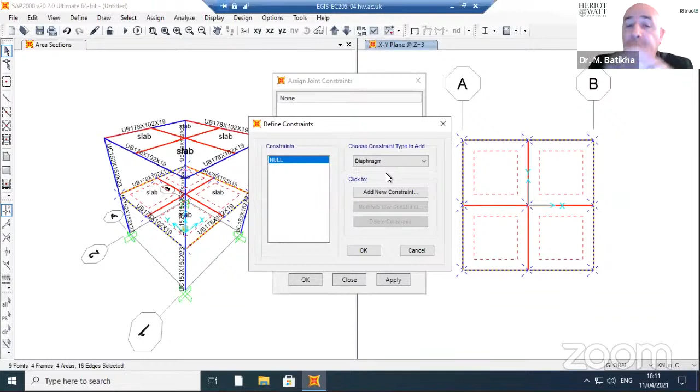The meaning of diaphragm in earthquake is that you have here a rigid slab which can confirm that all vertical elements connected to this diaphragm deform uniformly. Okay, so the rigid diaphragm confirms that all the vertical elements move or deform uniformly. So I'm going to say okay, and I'm going to say apply. So all these points now have a diaphragm.

And I'm going to the upper level and I'm going to mark this joint. And I'm going to say assign, joint, constraint. And I'm going to say diaphragm again, sorry, add a new constraint, diaphragm. I didn't add it, sorry. So diaphragm 1, I need this diaphragm to act along axis X. I say okay, okay.

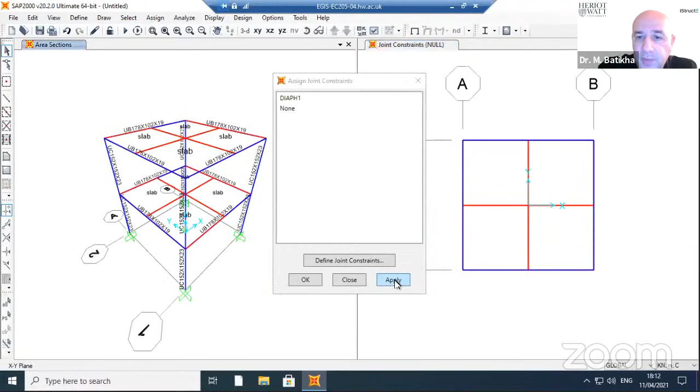So now I have a diaphragm. I'm going to the bottom level again, because I didn't apply the diaphragm. So select, assign, joint, constraint, define joint constraint, diaphragm again, add a new diaphragm. So this again about the x-axis. So for all the elements, the deformation along the x-axis will be the same or uniform.

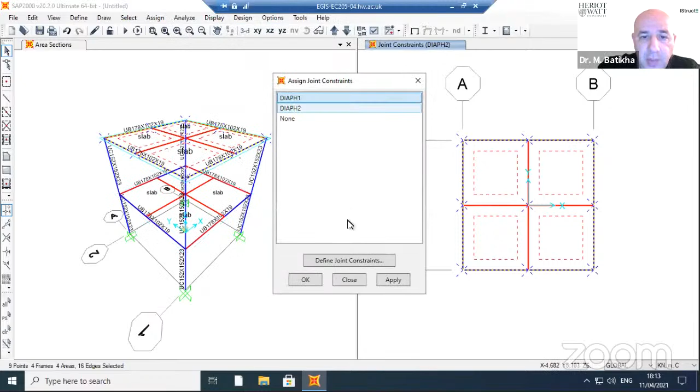So here, okay, okay, and apply the diaphragm. Have a look how all these joints are combined together. And I'm going up again and say assign, joint, constraint, diaphragm 1, apply. So here we have the diaphragm.

What I'm going to do now, I'm going to the bottom level, I'm going to select this node, and I'm going to add joint load force in X direction, which is 10, the total load. Previously, when I did the 2D frame, I divided this load into 2. Now I'm going to apply the total load, 10.

So have a look. I'm going up to the upper level. I'm going to select this point, and I hope that I assign this total load to seismic. Yes, seismic. So it's 20 kilonewton. Again, I'm going to say apply. So we have now seismic. Everything is ready. So I'm going to save this.

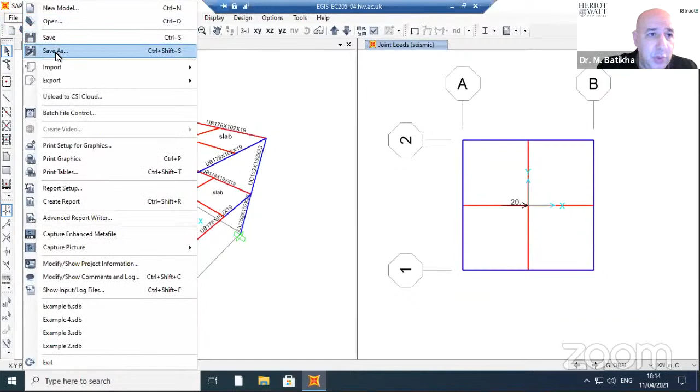And I'm going to say this is example 7. And I'm going to run this example. I don't need to run the dead load and no need to run the modal. So only seismic run. And here you see the deformation on the left side, and on the right side.

If I want to take the view, for example, let's take the XZ view. So here is the frame. And if you compare this bending diagram with example 2 and example 6, where we solved the 2D frame, you will see that it's almost the same value for the bending moment.

Okay, so this is how we do a 3D model. Again, these examples are simple examples, but there is a purpose to these examples. It's to start dealing with the software. So please, please don't go ahead to the software and do a complex example. Always start with a simple example that you know the answer to manually.

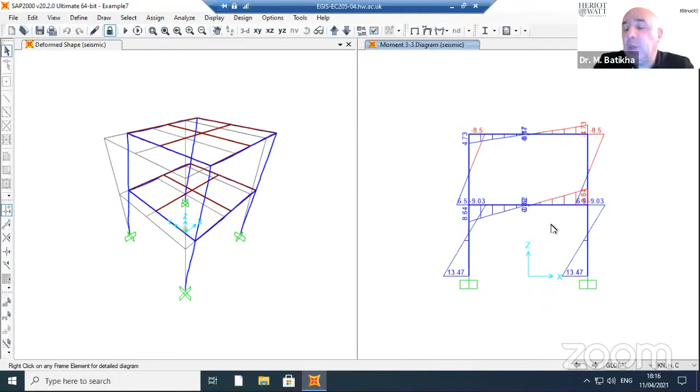Okay, and don't start with something that's a mystery to you. Do something you know first for practicing. After that, with full confidence, you can do a complex example. So that's all the examples we have for today.